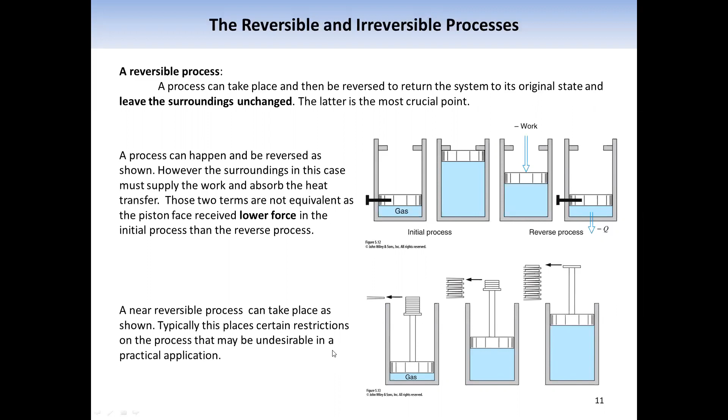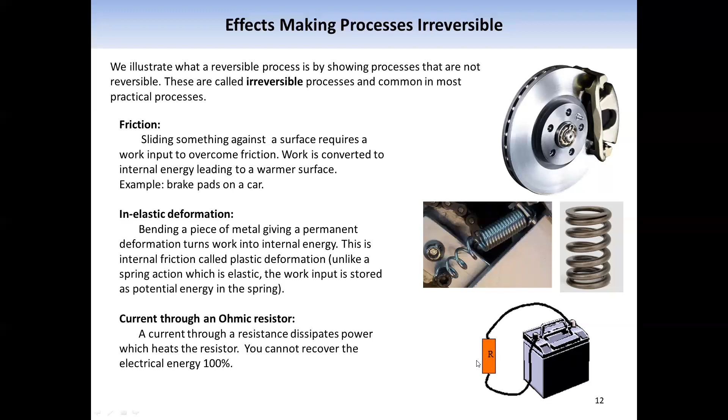The next example involves using electrical energy from a battery to heat up a resistor, and the heat from the resistor is eventually released to the environment. That heat cannot be converted to electrical energy directly without additional work. So the process, the electrical energy applied to the resistor, cannot be considered a reversible process.

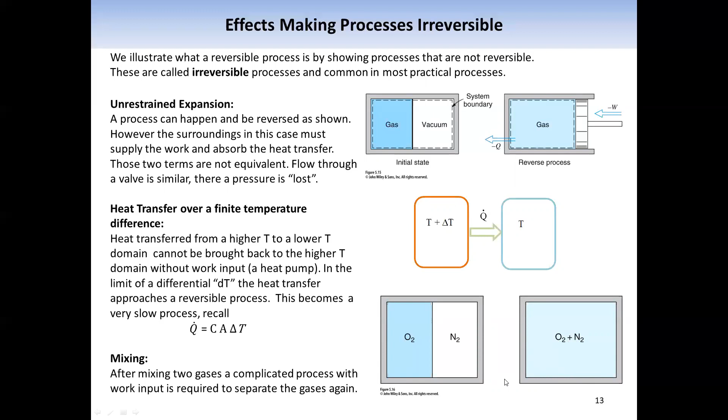So our next topic is closely related to the discussion of reversibility. Our topic focuses on a specialized heat engine. It's called the Carnot cycle. The Carnot cycle has the highest possible efficiency of a heat engine because it has the following characteristics. Number 1, it has the 4 unit operations of a common heat engine: boiler, turbine, condenser, and pump. But all of them are operated under reversible conditions.

When reversibility is applied to heat transfer in these 2 unit operations, we can say that the temperature difference between the reservoir and the working fluid is very, very small. And furthermore, we assume the pump and the turbine are operated under adiabatic conditions. That means there's no Q term involved in these 2 unit operations. As a summary, these 4 processes for a Carnot cycle involve 2 isothermal processes and 2 adiabatic processes. 2 isothermal, 2 adiabatic. And all of them are reversible.

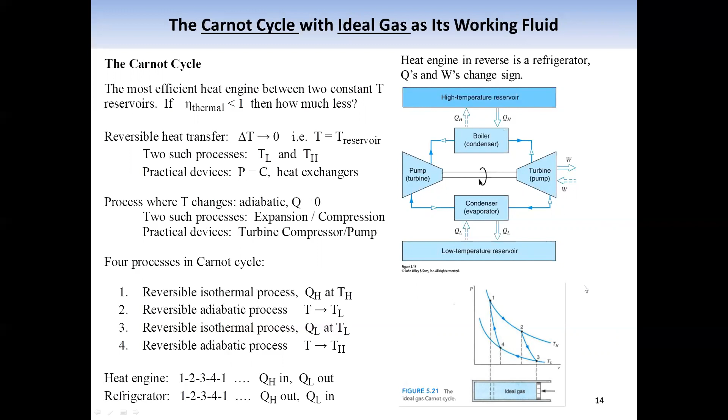Remember, when we discussed the Carnot cycle, we only discussed T high and T low. We didn't discuss the pressure at all. We did not discuss what kind of fluid it is. Therefore, it makes the scientists wonder if the thermal efficiency is related to temperature.

As we discussed earlier, a heat engine's efficiency can be expressed as 1 minus QL divided by QH. So that means if a Carnot cycle efficiency depends on temperature only, then QL to QH depends on the two temperatures only. This is a very interesting hypothesis.

Indeed, we can prove that this ratio is indeed equal to TL divided by TH if the working fluid is ideal gas. It's proved in the textbook in section 5.8. We're not going to discuss the detail, but this is a very important conclusion.

If ideal gas is used as a working fluid, the thermal efficiency can be expressed as 1 minus TL divided by TH. A very simple algebraic expression that has important implications. Number one, when this is derived, the absolute temperature scale is used. So that means the temperature in Kelvin should be used in this expression.

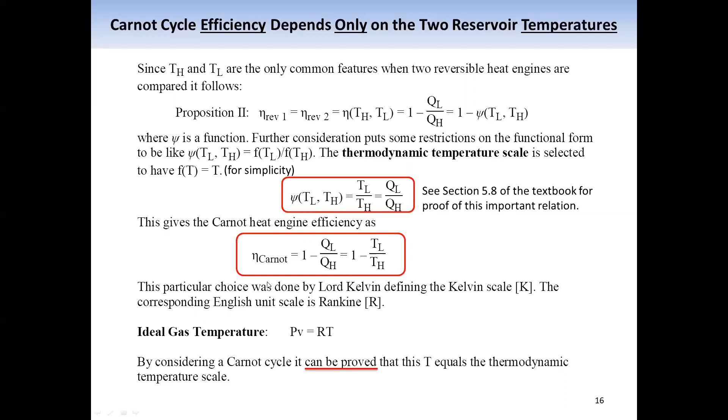The thermal efficiency of a Carnot cycle depends on the ratio of the two temperature reservoirs, and the temperature ratio should be as low as possible to keep the thermal efficiency as high as possible.